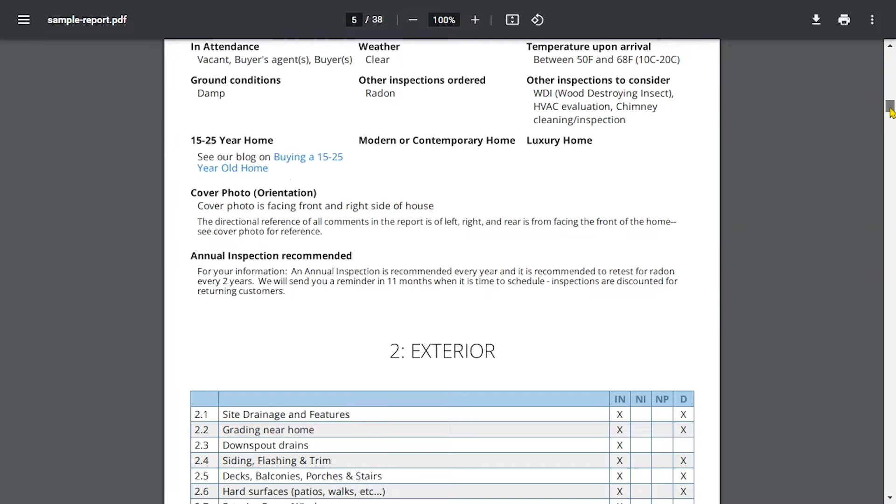Now we're going through the exterior. We made a comment here about the mature trees around the home, which can stress the gutters and cause overflowing gutters and other issues. We inspected this home right after a big rain event, and we saw that some of the surrounding grade was very saturated and wet, so they could do a better job of directing water away from the home. We also observed that the front slopes toward the home, and we saw evidence of water penetration at the basement in certain areas, which we'll get into.

This is common. Sometimes homeowners or contractors less aware of how to install a proper grading or drainage system will put a drainage system right up against the foundation wall, like here. You see this gravel system, probably a French drain, with a black corrugated pipe typically underneath to help direct water away. What can happen is if that pipe becomes clogged or damaged, which is very common, now you've allowed all this water to go right up against the house. And if that system fails, water is pushing through.

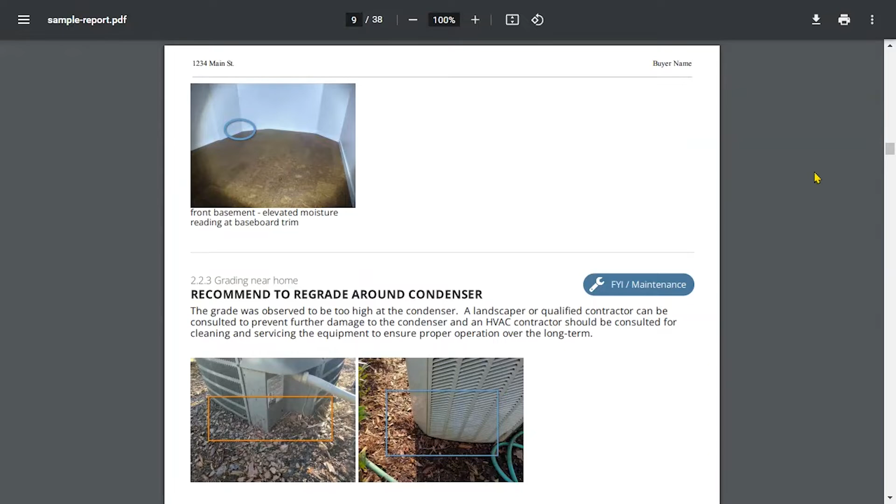We also don't want any water near the footing areas. Ideally this should be 8 or more feet away from the home. There should be a low point, swale, or French drain or other strategy, not right up against the foundation area. We did see evidence of water penetration in the basement here, which we go into further later on in the report.

It's common to see mulch piled up against condensers, especially as sellers prepare their home for sale and want to freshen up the mulch, piling it too high in many areas, including the condensers. This can damage your condenser. Not a big repair, but it's something that can cause expensive damages.

This is common to see in larger homes - we're not calling out a lot of decayed siding and trim, especially for newer homes, but we're seeing conditions that could cause issues over the long term. For example, this home had fiber cement, like Hardie siding, and there wasn't any flashing over these windows here at the rear, with 3 levels of windows. What we start to see, especially after about 20 years or so, is this becomes very soft above the windows, and the fiber cement becomes soft and deteriorates if it's in wet, moist conditions over the long term - siding sitting on roofing, siding sitting on decking, siding with improper flashing. Right now the siding looks okay, but in another 5 to 10 years, sometimes the damages can accelerate.

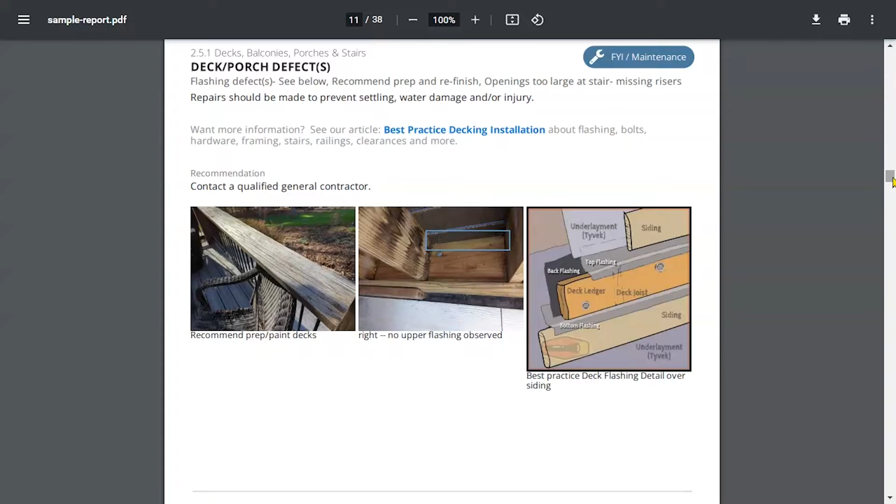Flashing at decks - it's common not to see proper flashing. Sometimes, depending on the side of the home and the prevailing wind directions, we don't really see any residual issues. Other times it can be catastrophic. And sometimes we just don't have access, like here on the other side of this deck, where it's a finished basement, so we don't have access to the framing to see if there are issues. We're just making a note of it.

And so hard surfaces, in this case stamped concrete. Ideally, we like to see the stamped concrete installed 2 inches below the siding and framing. If you see siding, behind that siding typically is framing, plywood or OSB sheathing. Even when those hard surfaces slope away from the home, water can splash and eventually make its way through the framing and cause air quality issues. In this case, there wasn't any drywall here, so we could see it. If there was drywall, we wouldn't be able to see it, and it might not even show up with a moisture meter. So this is what happens when you install hard surfaces right up against the siding and framing.

Similar observation with the asphalt driveway. It looks like it's sloping slightly toward the garage doors. We can see water stains, which indicate standing water. What can happen is it's very common to see water damage at the jamb on either side of the garage doors. This is also a place that wood-destroying insects like, because they can become consistently wet, and it's easy access for wood-destroying insects to access the wood framing here, because a lot of times with garages, the wood framing is right on the ground.

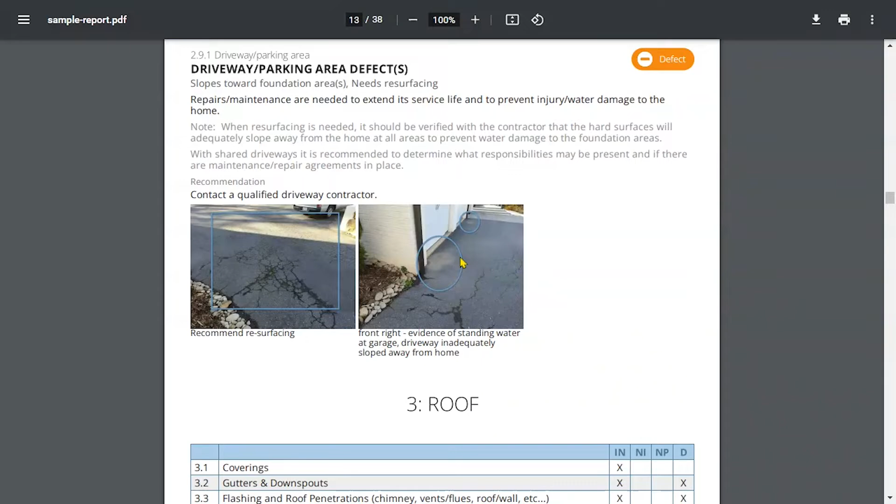Now we're moving on to the roof. The roof had been replaced, or it was a 35 plus year roof. Didn't really have any observations on the roof covering. The gutters, it did look like they were overflowing at areas.

One detail we like to see is when gutters intersect with sidewalls or siding, we want to see 1 inch between the gutter and the siding, and something called kick-out flashing. What that does is directs the water coming down the roof into the gutter. It's all too common to see water leaking at this seam, because these need to be resealed every 3 years or so with silicone or rubber spray, for example. If this gets clogged, it will overflow against the siding, and even with fiber cement, it will become soggy and damaged, and eventually make its way into the framing. So this is a detail we like to see where gutters intersect with siding.

This was a bit of a strange one, where the main plumbing vent was exiting through the roof. It was not properly strapped or supported to the ceiling, and all that weight of this PVC eventually, gravity took over and it just fell down. So now there's just a hole in the roof. You could see daylight, and water could get in there quite easily, and your sewer gases are entering into your attic, and potentially the occupants are catching a whiff of some foul air. That can easily be repaired, but it's an important one to discover.

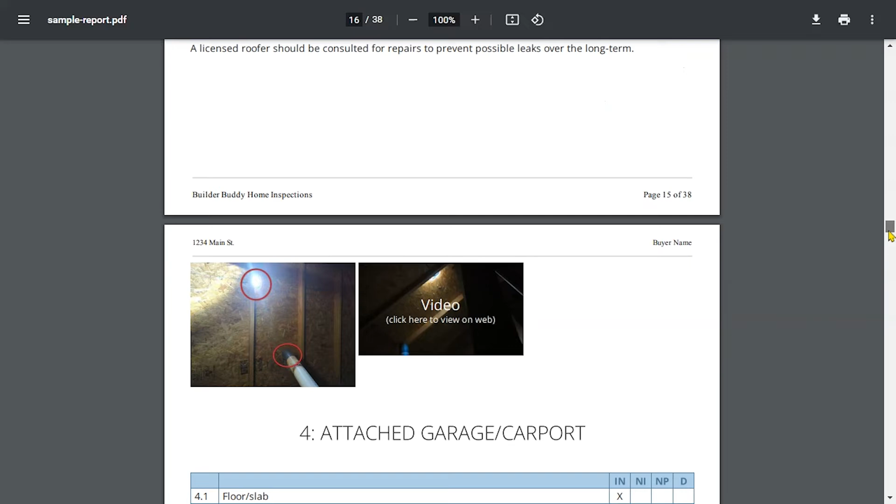Moving on, structural components. I like to take videos of the attic areas or crawl space areas where buyers don't typically see, or at least they don't see all of these areas. We always call out our limitations, things that we can't see. So this was a good find here.

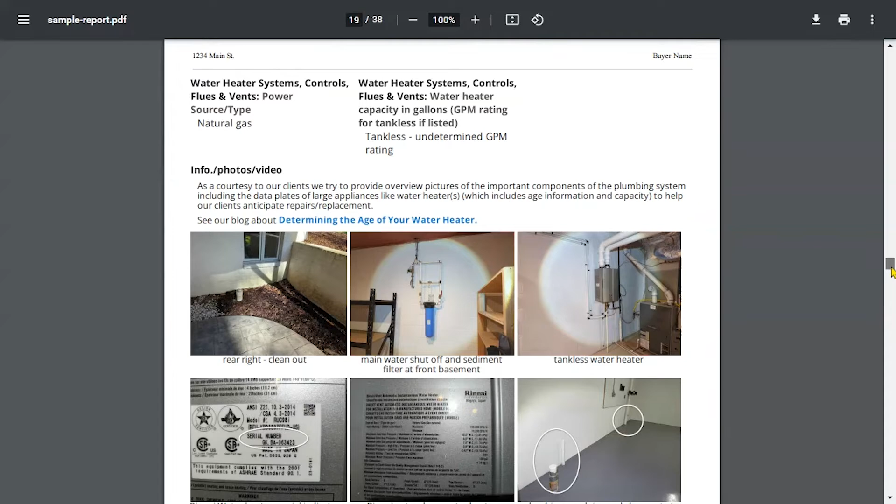Moving on, plumbing. So these are just sort of overview pictures. They had a tankless system. They had a sediment filter.

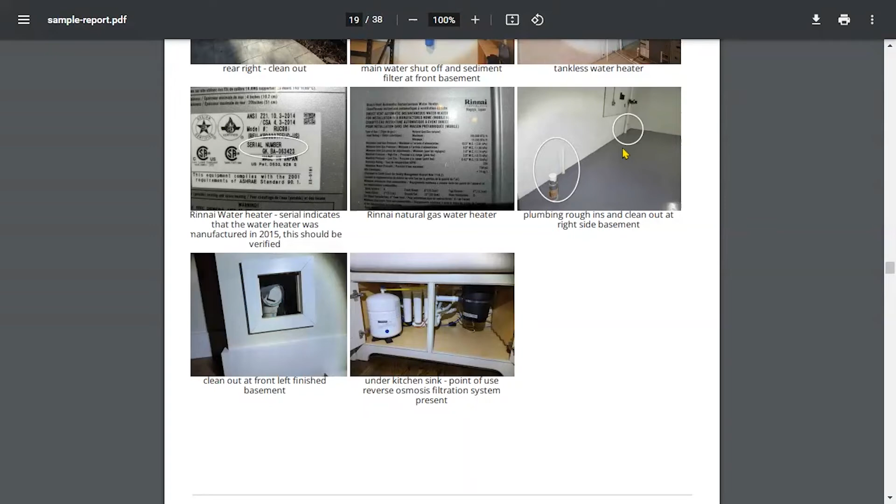They had rough-ins for future bathrooms, I believe, so that is good because putting in these lines below slabs is a very expensive project after the fact. There's a clean out, which every system should have for sewer or septic repairs. There was a point of use water filtration system under a sink.

Natural gas. It's very common to see leaks at exterior faucets. Typically, people forget to insulate these over the winter time where we have freezing temperatures like here.

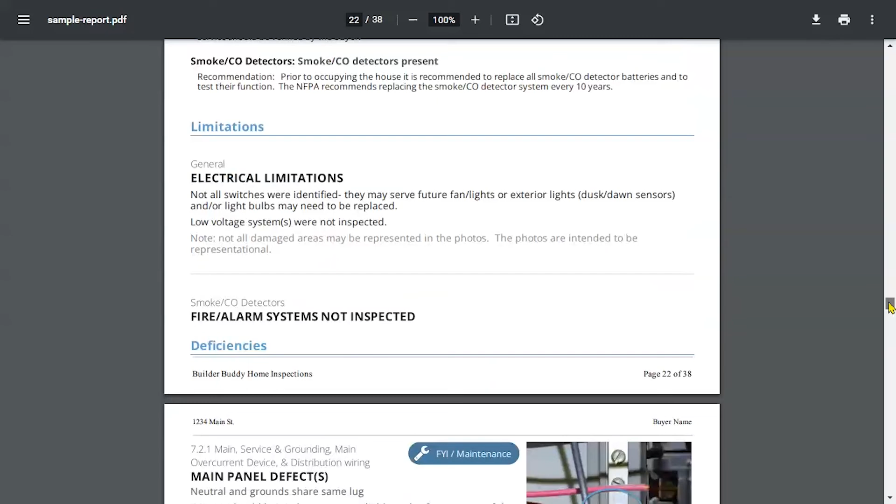So now we've moved on to electrical. These are just overview pictures here. Minor note at the panel.

It's very common at finished basements - a lot of times a buyer will buy a home in our area and the basement is not finished, so they'll have another contractor come, or sometimes some homeowners will do it themselves and finish the basement. It's not a difficult project, but one thing that is very common to see is...

DIY electrical, not enough outlets, or improperly wired outlets like hot, neutral reversed, or missing GFCI outlets because a jack of all trades is doing it, or the owner is doing the wiring themselves. So there are some wiring observations.

In our area, we typically recommend dehumidifiers in unfinished basements because we have very humid summers. We have missing wall insulation here at areas between the heated and unheated areas.

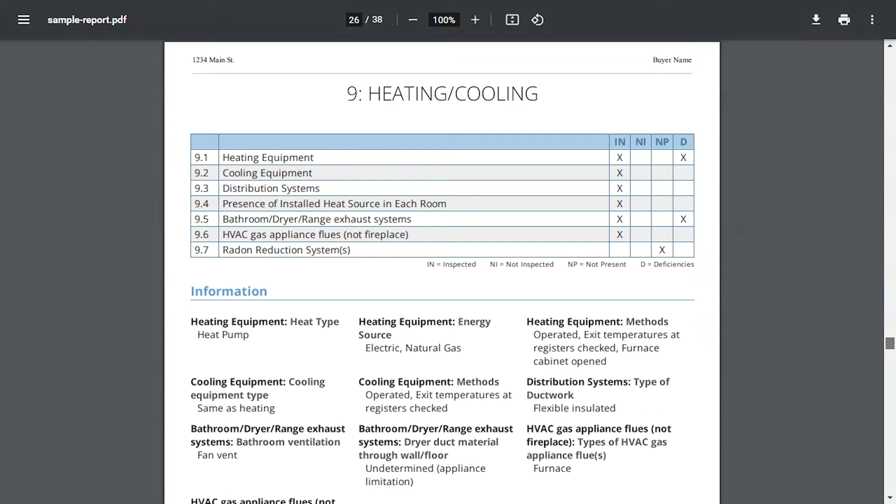So now we're in heating and cooling. This is a 22-year-old home. Heating and cooling equipment has about a 12 to 20-year life expectancy. So 15 years later - this was built in 1998 - they installed newer equipment, but now this equipment is 9 years old at the time of this video.

And it uses the older R22 refrigerant. So even though the heating and cooling equipment has been replaced, and it's only 9 years old, with that older R22 refrigerant, this really could go at any time and potentially need to be replaced.

And then because this is a larger home, there were two systems here, and this one is from 2014 with R410A, the newer refrigerant. So hopefully this one, if it's 8 years old, has another 7+ years of life left in it.

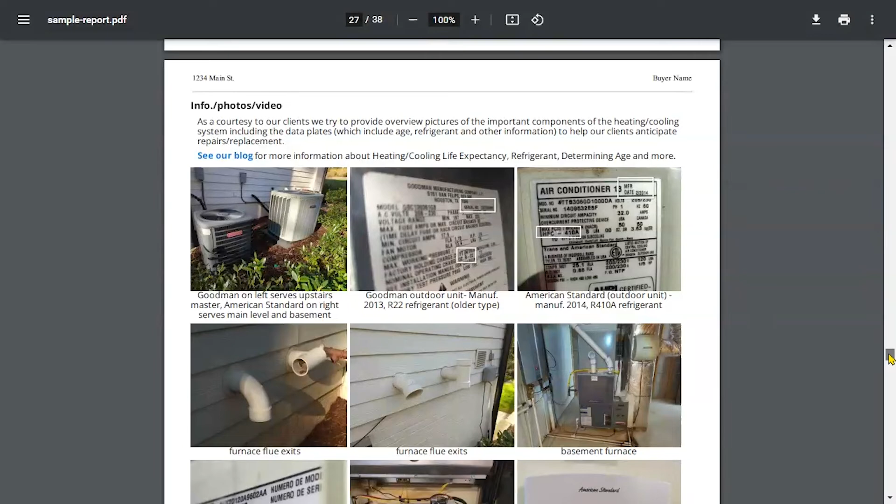So here's just more overview pictures of the heating and cooling equipment.

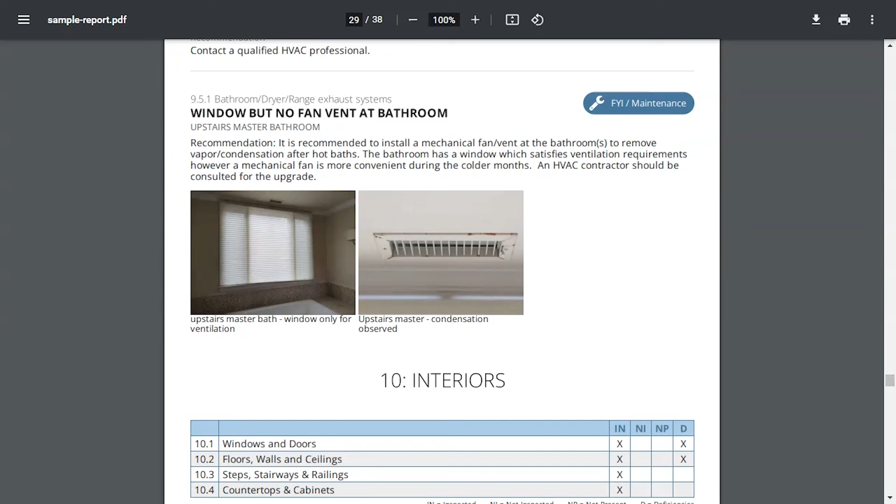In the upstairs master bathroom, there was a window, but not a fan vent. So sometimes the occupants take a hot shower or a bath in the winter time, and they don't feel like opening up the window, so you'll get condensation at the ceilings, for example.

And windows - at 22 years, regardless of the window type or manufacturer, we're going to start seeing failing energy seals, windows that don't open and close properly, issues with the hardware, cloudy windows, which we're seeing here.

So the window observations are starting to add up in this house and are likely to accelerate over the coming years. With a 7,000 square foot house, this window repair package could become quite expensive to replace. We did have a minor door observation as well.

One note that we like to make is about rooms in basements that look like someone might want to put a bedroom there. We just like to let people know that typically you want to see either a door or a window directly to the outside for it to be a habitable bedroom in the basement. It needs an emergency egress - a door or a window directly to the outside, or it would not count as a safe bedroom.

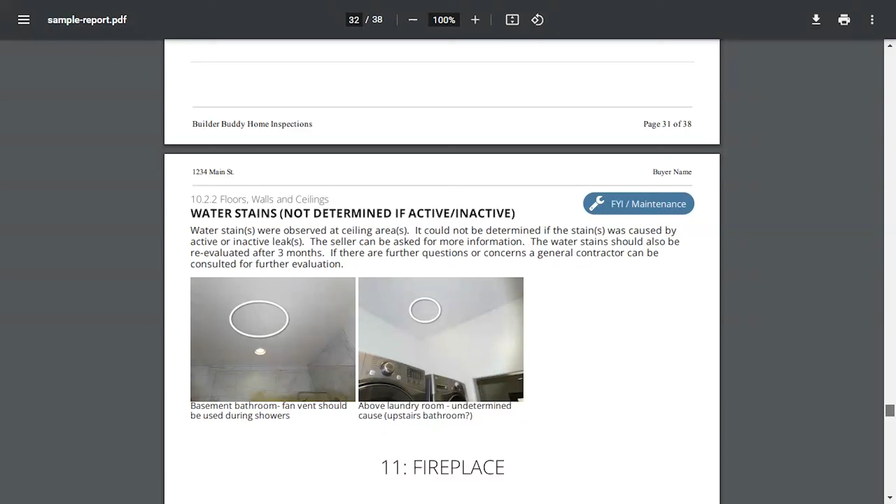And then we just made some cosmetic observations here. We did see some history of leaks at ceilings. We don't know if they were active or inactive, probably inactive in this case. We're going over the fireplaces, and that is it. We do not find any wood destroying insects or mold issues here.

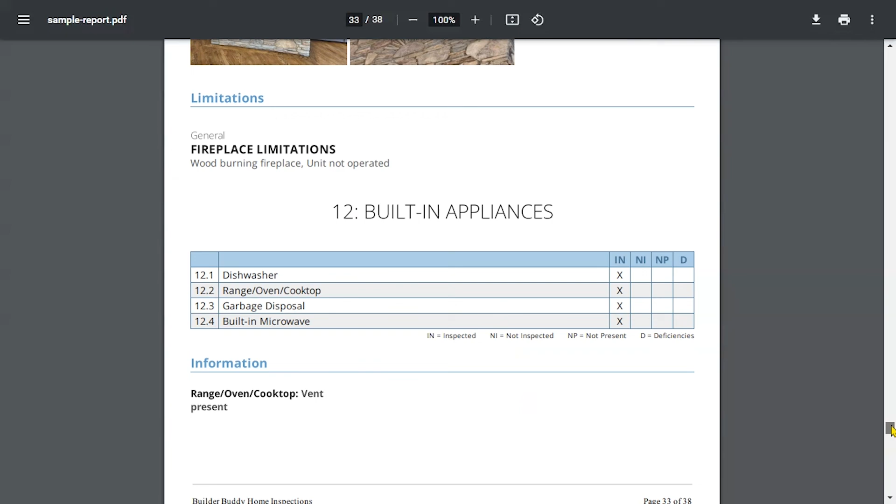So this is a luxury home over 7,000 square feet, and it's about 22 years old. So thanks for watching the video.